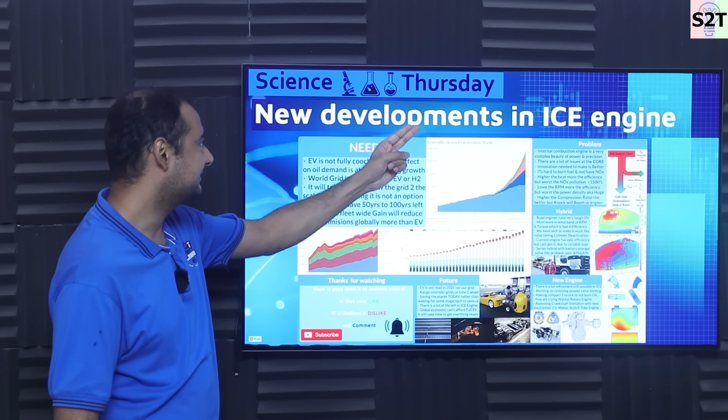In today's show, Science Thursday, we're going to talk about new developments in ICE engine, which seems odd in 2025, but let's dive deep into it.

So why do we need development in internal combustion engine? Well, reality is EV is not fully cooked, meaning that technology was rushed into the market because of Elon Musk, and practically speaking, that puppy is 3 months old rather than 9 months old. So it's not there. And here's the deal.

You can see it in oil charts, as in global oil consumption by any major nation. Outcome is zero, as in it has zero impact. The biggest impact we had in oil consumption was the pandemic. The pandemic actually dipped it. Nothing else did.

And again, you might look, okay, it's not old enough. No, it is old, as old as the iPhone. That's the same time EV happened. And be mindful, there were other companies doing EV before Tesla made it popular for some reason. But people were working on it.

So reality is, as of now, best analytical data, like actual real world data, suggests that the best you are getting out of EV is this line. Instead of going up, it is going like this, and which again I find rather useless, simply because world's population is not expanding, and more countries are going into recession rather than swimming in money. So it's like people's living standard is going up? Like, genuinely, I'm curious, which country?

So from 2010 to 2025, things are not looking up. Population is declining. People's living standard, inflation are running away. So who the heck is drinking all the oil? Reality is EV is not real. It's almost like you released a vaccine for a pandemic and the pandemic is still going on. So fundamentally, it's not real.

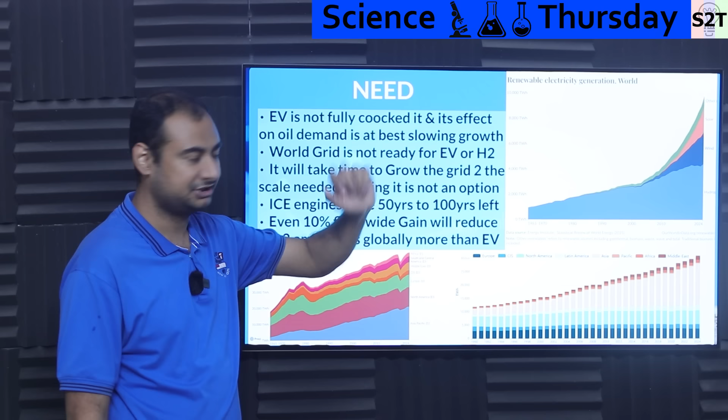Now, here's the deal. Let's just assume you have a magical wand, right? You are some politician who smokes weed, and you're like, okay, what if I just forced everybody to do EV, like how the European Union is thinking, like we're gonna ban combustion engines because let's F the public. Or what if you really do not study mathematics or chemistry or any sort of round trip efficiency or thermodynamic conversion efficiency, or how 8 megajoule is less than 32 megajoule, hydrogen.

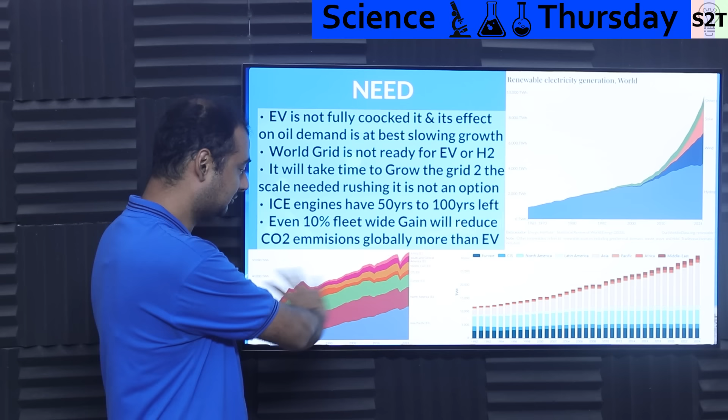Here's the thing: our grid worldwide cannot do that. For example, take all the oil consumption, take the lightest fuel, let's say petrol, how much petrol we are burning, convert that into kilowatt hours, divide that by like 30% or 25% conversion efficiency. That number is so huge that our global electrical grid will collapse the moment you put that much load. Kaput, instantaneously. It does not matter one place or another, all of them.

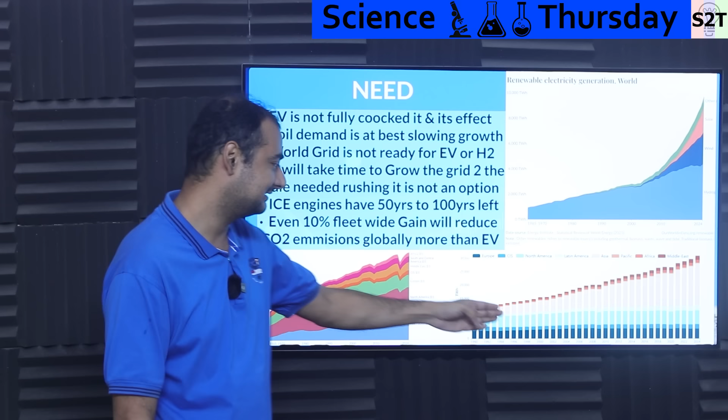This is the world energy grid growing from 1990 to 2024. It has gone from 10,000 terawatt hours to slowly reaching 30,000 terawatt hours. That's nothing. Oil is like, bruh, that's nothing. So flat out right now, you cannot do EV conversion.

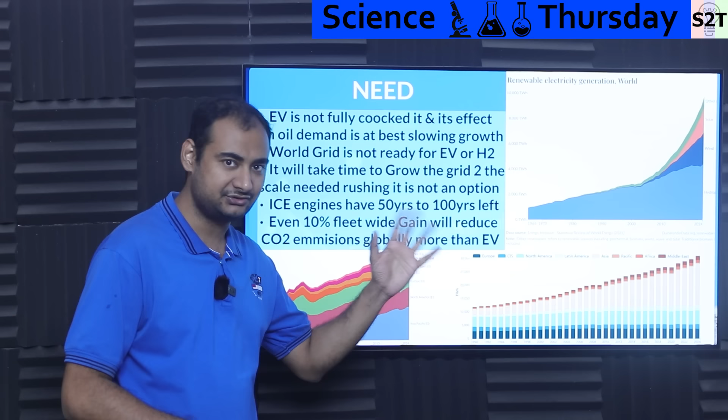And if you cannot do EV conversion, you cannot do hydrogen conversion, because hydrogen has poor round trip efficiency. EV can give you, give or take, let's say 90% easy, like a good built system, 90%, as in 100 units you took, 90 units will go into your electric motor. Hydrogen, you took 100, at best, being optimistic AF, 40 will go to your wheels, meaning twice the price, meaning you will burn your country.

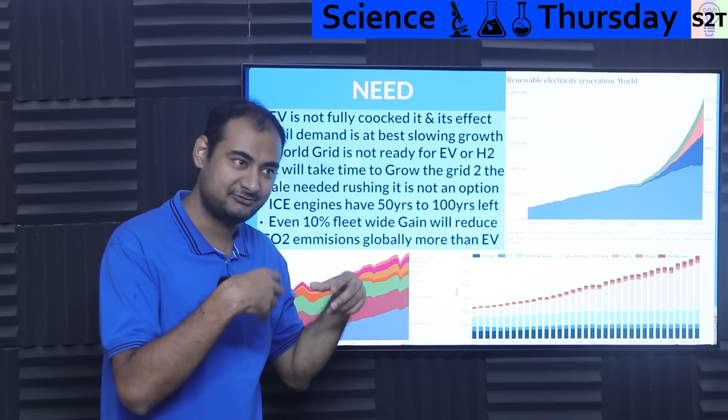And what about the energy grid transition? It's going good, but again, you will find something weird. People talk about solar, like going solar YOLO on it, but why the heck is wind share so huge? Compare this from 1965 to now. It's like, why is that? Well, wind energy has this unique advantage that whenever a single plant is built, it's huge, like they started talking 2 gigawatt, 22 gigawatt.

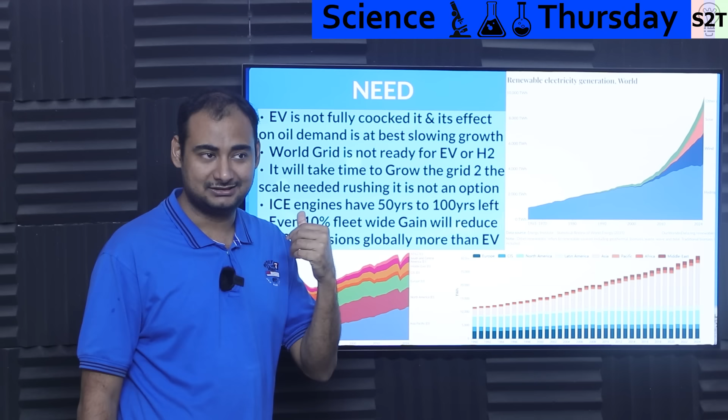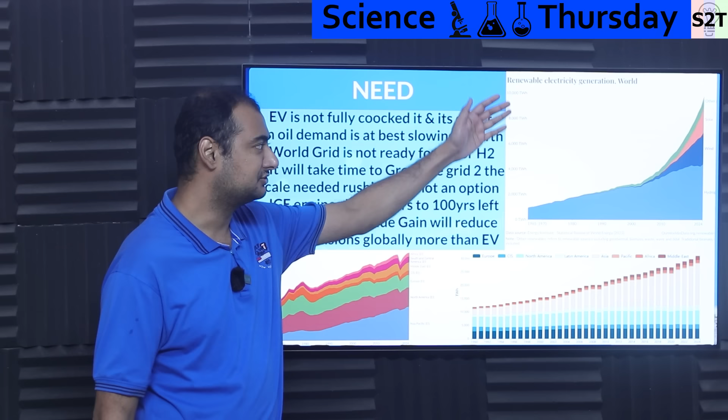Wind turbines are now reaching above 10 megawatts. Most new wind farms being built are above 10 megawatts right now. You can easily find Haliade-X or something like that from General Electric. Those are 16 megawatts. That is damn high, and you put them offshore where yield time is very high, so the amount of energy being created by wind is huge. Solar is also going huge. And then we have some minor things here and there.

Realistically, at this point in time, our grid needs time to grow for managing EV. It's not ready yet, let that be very clear. Going into full EV will shift-delete your country, flat out. Do not give me comparison to some teeny tiny whiny nation, give me comparison in top 10 population countries. All of them will have the same outcome: if you do that much EV conversion instantaneously, the electrical grid will go kaput.

So what does this mean? Grid needs time to grow. Will the grid grow? Of course it will grow. You can see it's been growing slowly, but it is growing. So it will grow, that's a sorted problem. You do not have to worry about it, but you cannot rush it.

Where will you get the money to force people to jump into EV, and then at least 5-10x the money to create the grid infrastructure to handle it, and then 20 to 40x the amount of energy production to handle it? It's not happening anytime soon. It has to be done slowly, it has to be grown like how you grow a tree. It cannot be rushed, that's not an option.

So what does this mean for you and I? Simply means the ICE engine, bare minimum, has 50 years and easily 100 years left. If I'm being idiotically optimistic, let's say somebody invents something super magical, or heck, we crack fusion energy, only then can I see it happening in 50 years, but the likelihood is almost zero. I'm too old for fusion now. But 100 years, easy, you do not have to worry about it.

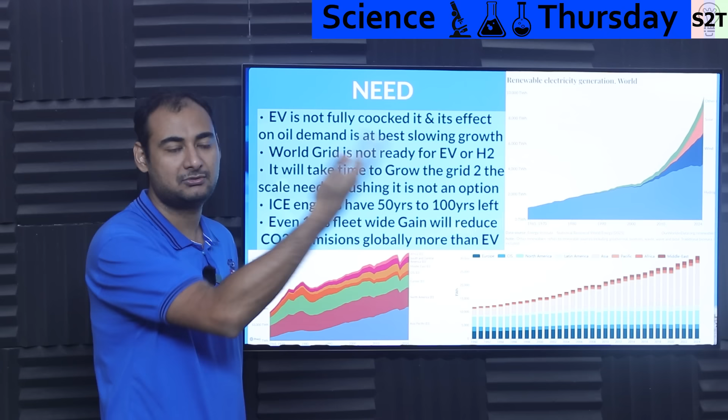What about the future? The only viable solution we have, which has the least consequences and the most viability, is seaweed biofuel. Nothing else has the probability of working. You cannot grow it on land, you cannot grow ethanol or anything on land simply because you will shift-delete food crops, and the penalty of that would be stupendously high food prices. Indians are slowly starting to realize that, because our politicians pushed ethanol. So that's the reality of it. You can only grow it in the sea.

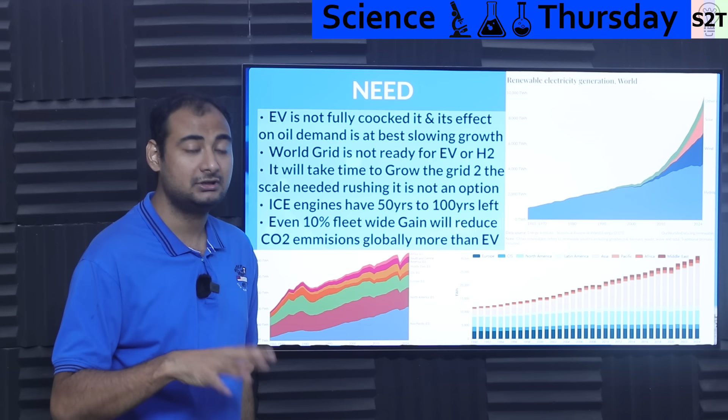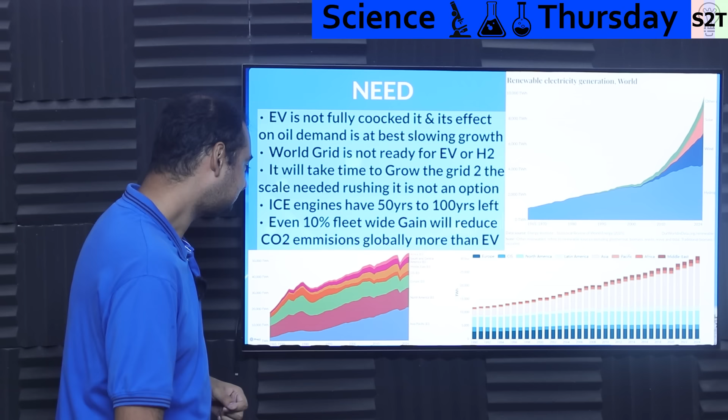What about the bio-environment? Here's the deal: you do nothing, the whole planet dies. You shift-delete a small area in the sea, and given the surface area requirement, it's super easy to do. From India's point of view - I'm not talking about Afghanistan, I'm talking about India - we will not even touch international water, we can literally take care of it in our own economic zone. We do not have to go to China or other places, within that alone we can easily take care of it.

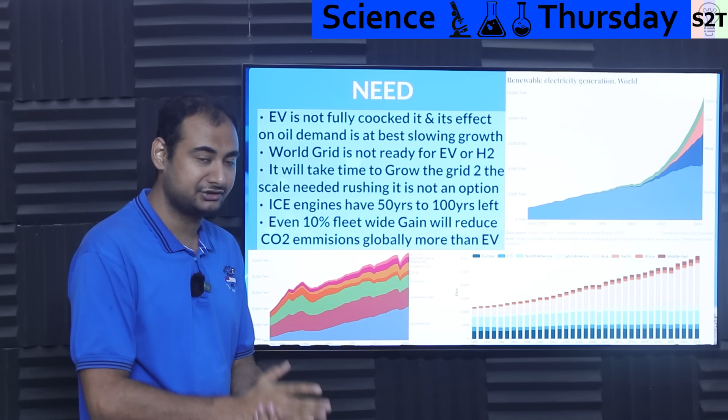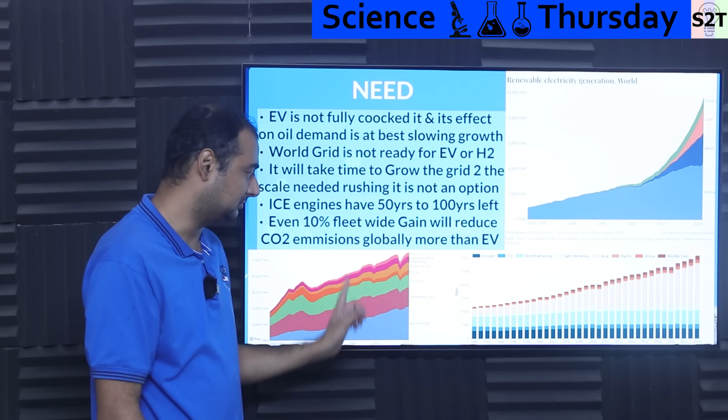So saving the planet takes priority, and then you have to make sure the combustion engine is better. Right now, talking 2025 fundamentally, you can negate all the CO2 talk around EVs simply by improving combustion engines by 10%. That's the reality. Check all the data, all your sources, go YOLO, especially on crude oil - there are 10,000 data sources on that, go YOLO. So what exactly is the problem?

Well, the problem is the internal combustion engine is very complex, a beauty. It is brutal in terms of power and precision. And because I'm working on making one of them, I'm realizing it is brutal. You will think, oh, I have the CNC machine, I'm going to put this and come out, but the part does not work. It does not match the tolerance requirement. Because we have mass produced it and fine-tuned the whole design, it feels like it's an engine block. No, it's black magic.

Fundamentally, it is complex AF. And power and precision, think about this: we are talking about something that handles a boom event 6,000 times a minute. It's like boom, a boom, a boom, and you can have 12 or 16 of them in a car. It's like, what?

So fundamentally, there is a lot of complexity, and the penalty of that is there is a lot of issue at the core level. Basically, the core things we use in an engine have some problems, and then there are certain physics-level things that make things complicated.

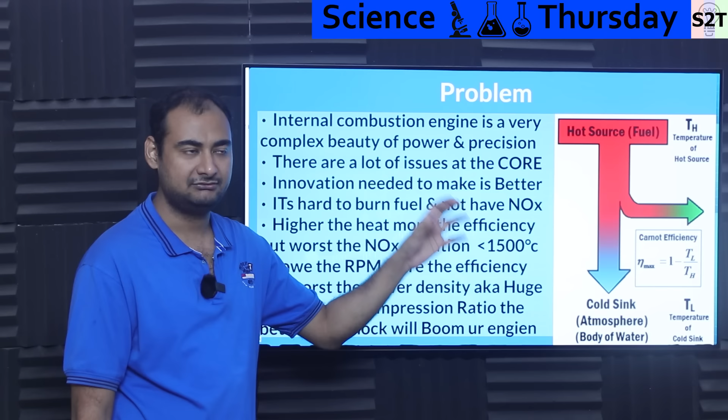So can we change it? Can we solve it? Of course. Exactly how we have improved from what basically Henry Ford had. If you take my cheap car engine, like a Maruti S-Presso K10 engine, and gave that to Henry Ford, he will have a stroke. It's like, what black magic is this? And that is the cheapest engine you can get. So fundamentally, innovation will allow you to make it even better.

Now, why are people innovating now, not 70 years ago? Petrol was cheap, nobody was caring. I know the fuel prices when I was in school, and I'm only 32 or 33 years old. That time fuel price was 40 rupees per liter. Now it's 100. So the price has almost more than doubled in less than 20 years.

So as fuel becomes more expensive, you start to notice, oh, my pocket is starting to hurt. Rich people do not worry about mileage. That's why you do not see what is the mileage of a Bugatti Veyron or a Ferrari. That does not make sense. If you're driving a Ferrari, you are not poor enough to worry about those things. You are rich enough where it's just go to the pump, fill it, go home. I ain't got time to count. So that is there — innovation can make things a lot much better.

Now, why do we have such a cumbersome rule with combustion engines? Well, simply because it's hard to burn fuel and not have NOx emissions. This law of physics says the hotter your boom event, the more useful energy you can get out of it, like Carnot efficiency.

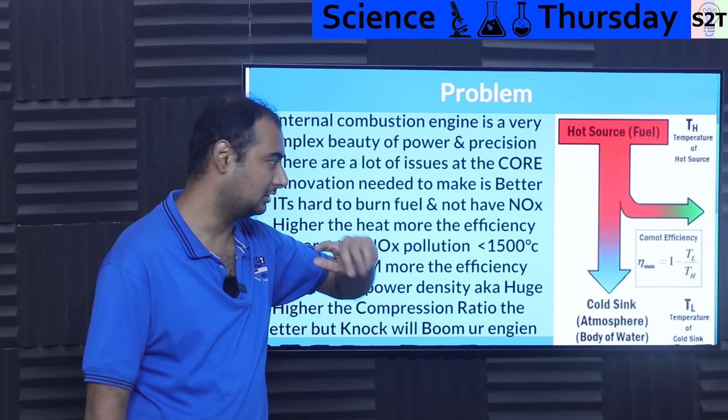But here's the deal: when you are flowing air into the engine, it's not oxygen only, you have a lot of other stuff. The biggest other stuff is nitrogen. And if you have that much nitrogen going in there and the temperature is brutally high, along with some oxygen, it will create NOx. So basically, the moment you start to reach 1500 degrees Celsius, NOx emissions start to go up.

But again, physics wants you to be at higher temperature. Physics is like, bro, you want efficiency, you have to have higher temperature. But if you have higher temperature, like diesel engines, you get higher NOx pollution. That's why people hate diesel. It's like diesel loves compression ratio. People started to make high compression, and it became thermodynamically more efficient. So people loved it, they used it more because it was actually consuming less fuel.

But while the CO2 output went down, the NOx output went YOLO. Right now it is so bad that we have to use ammonia in exhaust gas treatment to make sure it does not pollute the whole environment. Because again, physics is like, bro, heat it up.

And NOx is like, easy, bro, easy. Same applies with jet engines also. They're like, we want fire. And NOx is like, are you sure about that? So you can see how we have two things that are firing missiles at each other. It is hard to manage.

And RPM, that's another vector you are familiar with. RPM is so weird, as in the lower you make it, the more efficient it becomes. Right now, the most thermodynamically efficient engine is basically marine engines used to propel ships. Those can touch BSFC value as low as 150 to 160.

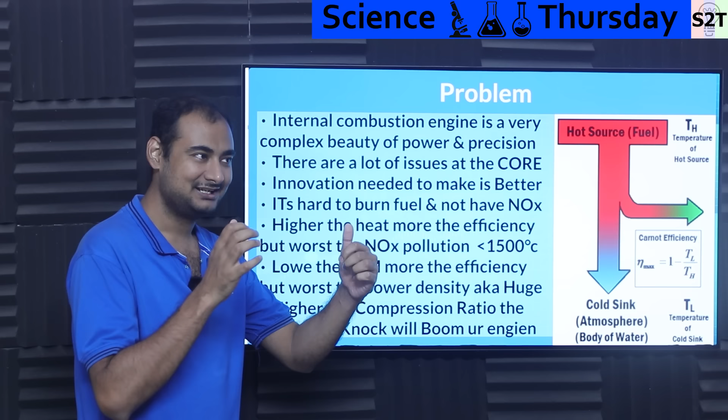The higher the RPM, the higher the density. Cool, awesome, GG. But poor the mileage, so to say. So if you're like, okay, why not just make big engines, like let's say a locomotive. If you make a locomotive engine as huge or as low RPM as what is used in ships...

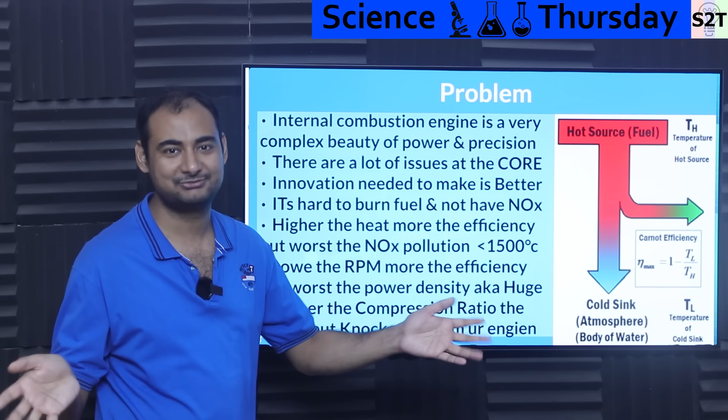It will not fit in a train. The whole train will not be able to fit it, it will be so big. So that's the fundamental issue. That's why they only work in a container ship. That area has the space and weight constraint loose enough where they can actually do that. So you see, there is a paradox. You're like, okay, what if I want more efficiency because petrol is expensive? Cool, awesome, reduce the RPM, but your engine size grows. You see the paradox? So this is the issue.

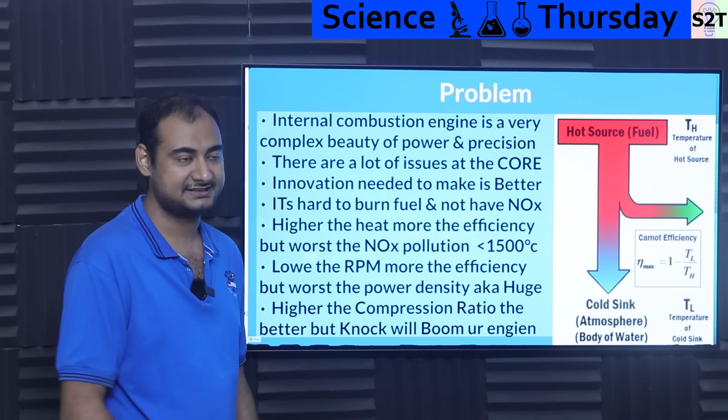Another aspect is, what about compression? What if you go higher? If we started with very low, like 4:1, 8:1, now you're at 14:1. But you can't really go that high unless you have something like octane or ethanol blended into your fuel, because again, knock will happen. As in, before you reach your top dead center, your fuel and air mixture will auto-detonate. It will kaput your engine, flat out kaput your engine. So even though physics says higher the compression, higher the temperature, higher the efficiency, knock says, are you sure about that?

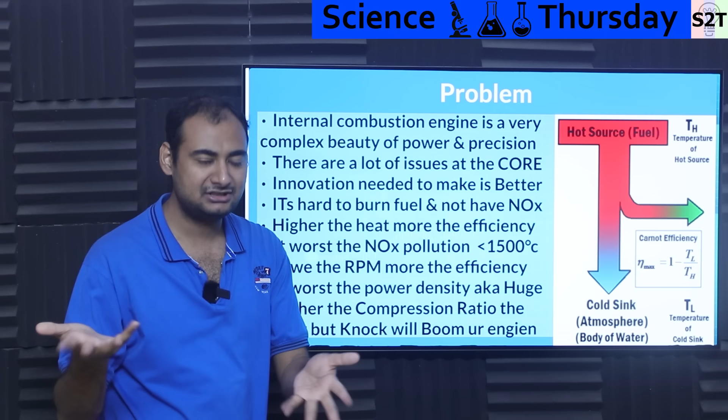So there is some genuine problem. It is not easy to design an engine that is super efficient and not polluting, super efficient and small. So you can see it's very brutal, and very not black and white, because you're like, okay, what if the engine is bigger? Yeah, the engine will weigh so much that your per kilometer mileage goes down. So fundamentally, it's a messy problem to solve.

So what can we do? Well, there are a lot of options. Option number one is hybrid, because right now road engines have a very tough life, meaning you can easily find road engines that have this sort of stupid curve, as in they're supposed to work as low as 500 RPM and as high as 6500 RPM.

That is huge. To give you context, your power plant generator rotates at 1 RPM, the end. It starts, it rotates, the end. There is nothing more than that, and it runs your whole civilization. If it's a 50 hertz system, 1500 RPM, it's a 4-pole generator, or it could be 2 poles, so it's like 3000 RPM, done, go home. It stays there, it's 3000, the end. There is nothing after that.

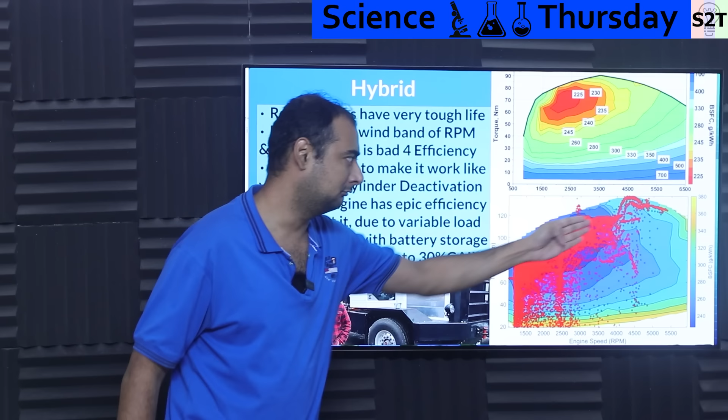It's brutal. Your engine does not like this, and you can see that in the BSFC chart. Let that be very clear - every engine is measured by that. You can measure a vehicle's mileage as kilometers per liter or miles per gallon, but engine cannot be measured that way.

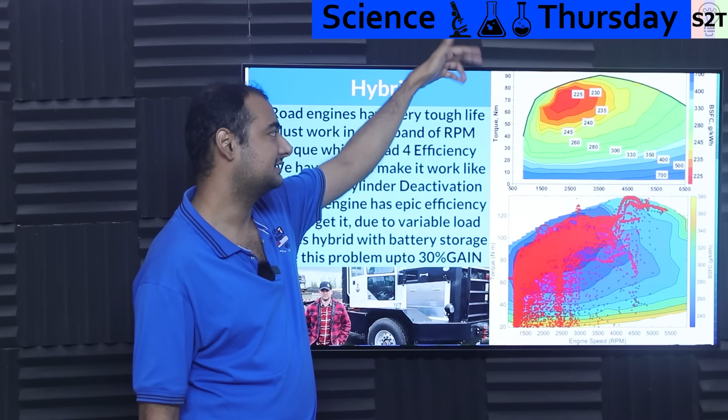So we invented BSFC. Now BSFC is calculated by setting the engine to a fixed RPM, then you put variable load on it - 10 Newton meter, 20, 30, 40, 50, 60, 70, 80, 90 - and you do this throughout the RPM range. That's how you get the BSFC curve.

Now this tells you where the sweet spot is. Because combustion engine is so complex and weird, it has this tendency - if you idle it, you will burn more fuel. It is better for you to shut off your engine than to idle it.

For example, let's say you're at 2500 RPM, cool, normal city traffic, and you're just idling your engine - your torque load goes down. Here's the deal: you will burn as high as 500 grams per unit of energy. Only 1 unit of electrical, and you have enough parasitics that you do need load on it. So 500 grams will be burnt just to make 1 unit of electricity.

But what if you put load - what if you put 70 Newton meter? You're at the sweet spot, loading that puppy. Now you only need 225 grams of fuel to make 1 unit of electricity. That's the key point. So right now, because we want engines to work in such a vast range, we cannot utilize this sweet spot. We want our engine to stay here.

The end - why? Petrol is expensive. The end, do not talk about anything else. We want power? No, you want mileage. You can't afford power, otherwise you will buy a Bugatti Veyron. So flat out, we want to stay there, and we cannot afford to. Environment cannot afford to. Our pockets cannot afford to.

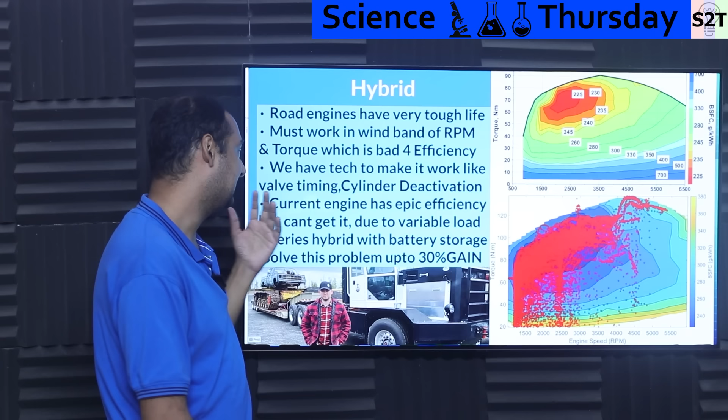So we have created a lot of technology to extend that band, so to say. We have variable valve timing - almost all engines have variable valve timing. Some supercars started to introduce cylinder deactivation, which is slowly trickling down. What if you have a 6-cylinder engine, you turn off 2 of them when idling, because you do want some load. It's better to have dead cylinders rather than all cylinders working at partial load.

So we do everything, but here's the deal - current engines available in the market, in your car, are very efficient, like bonkersly efficient. If you have a real-time mileage counter in your car, you'll notice that sometimes the numbers are too good. It's not too good - it's when it stays here.

But because of variable load, your engine never stays at the sweet spot - it goes like this. That's what happens to your engine, that's why it's not shining. Because when you give accelerator, your engine computer is like, okay, how much load do I have, how much torque is that, feedback happening from the transmission. And even if you are perfectly well here, then the wind starts to flow, your Newton meter will go up, your efficiency will drop. So fundamentally, this is the outcome.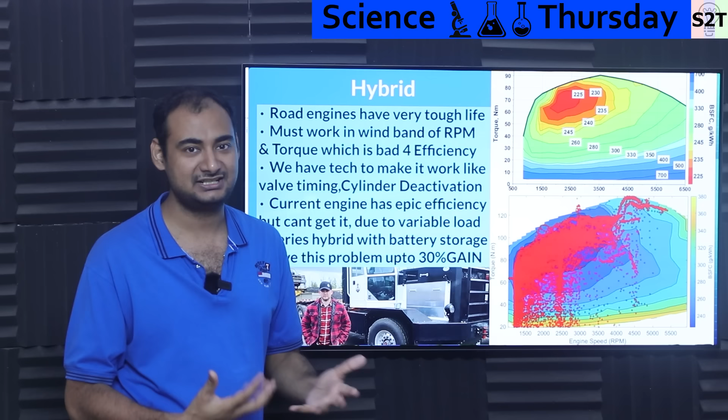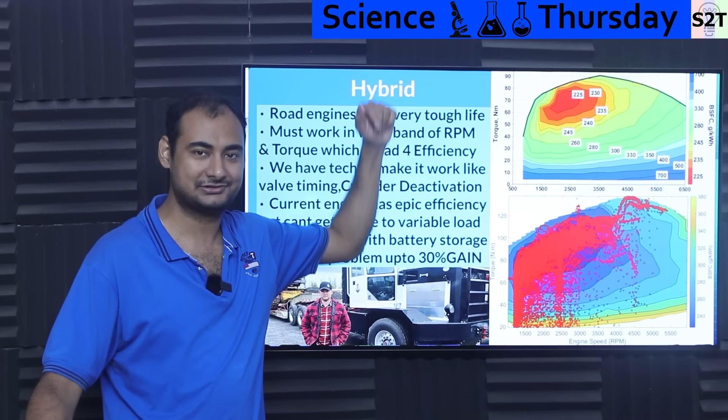It has variable load. So series hybrid solves this problem specifically with battery storage, because companies figured out that at least half of the problem can be solved - you can lock the RPM if it's a series hybrid. That's how diesel locomotives have worked for a century, and diesel submarines are even better because they lock the torque also, so they get the best mileage conversion. So why don't we do this with cars? Again, petrol was not expensive enough.

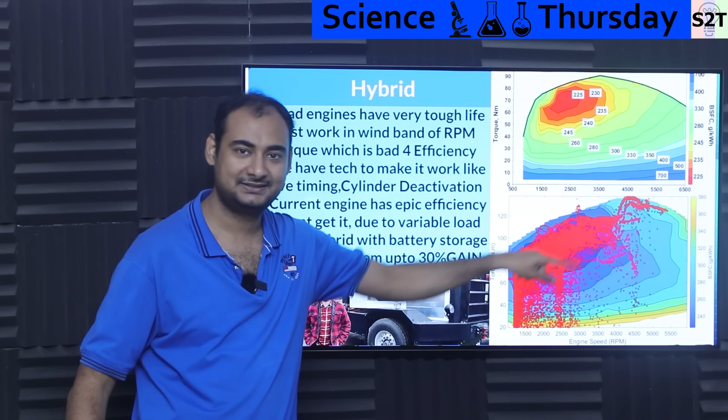Now, the development of EVs did allow this technology to be viable. Meaning right now you can have a series hybrid, where you have a combustion engine driving a generator powering a battery powering the motors, because motors can handle random efficiency, and motor efficiency does not change that much unless RPM goes way too low or way too high. It's good.

It has a much wider efficiency curve, and if you have good enough motor driver electronics, it's negligible. You do not have to worry. It will be like, okay, I'm going to consume this much unit of energy to run 15 minutes. It will take that much.

And again, battery allows you to have a reserve. Basically, this puppy stays there, gives a pipe. That pipe would be, let's say, 100 kilowatt. Your buffer handles it. Buffer slowly fills up, slowly drains, fills and drains. When you need to take over, the buffer drains, not the engine. Engine does not change the loading. Engine stays at the sweet spot.

The battery goes down, then you do regen. Battery absorbs the energy. Generator does not shut off. So it turns on, stays on, charges the battery, turns off, the end.

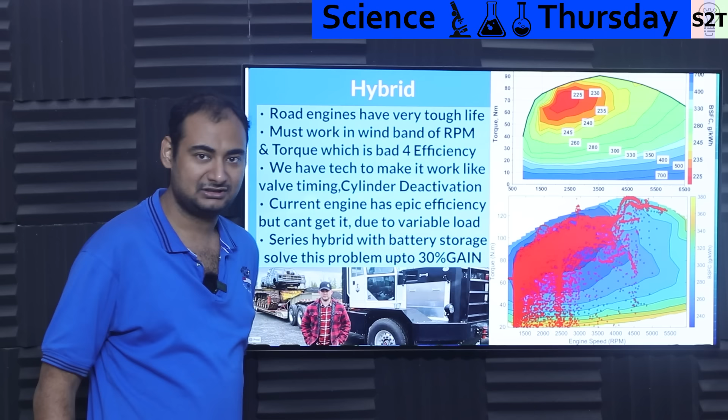So how much of an impact will this have? Well, if you start to do this on a large vehicle, a 30% gain is viable. Especially if both the RPM and torque loading has to be locked. And 30% on a big vehicle is like you are yeeting one car out of the road. That's how magnificent the impact would be.

And no new technology is required. Everything needed for this is right now in the market in 2025. And Toyota had this in 1993, I think. That was the first time they started. They had this technology with nickel hydride battery, but people smoked too much Elon Musk. They're like, no, we want 100% EV.

It's like, bro, the grid is not ready. If you had given this, everybody would have EV by now. Everybody would claim like, oh, I want 1,000 kilometer range. No, you don't. You say that, but most of the time you can't drive that much. Just have a small range, charge your battery, and if you forget to charge it, your combustion engine takes care of you.

And again, Toyota was halfway there. They almost reached it, but they were like, what if we had series-parallel hybrid? It's like, no. But to be fair, at that time I think AC compressors were not electrified yet. Right now we have AC compressors that are electrified, so that problem is solvable, and you can take care of big loads today.

And if you have electrical infrastructure growing, like let's say a lot of trucks are going, then people can say, hey, I can put a high power charging station because I have demand. Then they're going to put it there and charge the battery directly, plug-in hybrid.

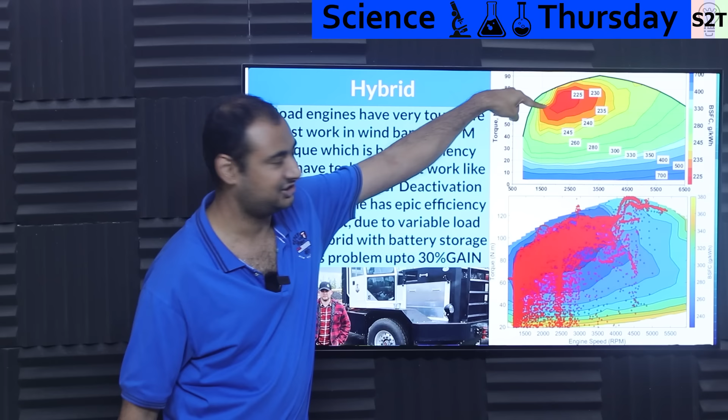So hybrid will give you direct pollution reduction right now. If you go full EV, all you are doing is pushing the pollution somewhere else. But hybrid will actually reduce pollution now. And if you did this for almost every combustion car, 80% of people would have EV, 80%, and 20% of the time they're like, oh, I'm actually driving long distance, so I'm using combustion. And again, even then, the combustion will be far more efficient. Sweet spot. But no, everybody wants full EV.

Now, okay, that solves how can you get the most out of the engine you have. But what if your engine became better? Well, there are a lot of refinements possible in ICE, let that be very clear. Even though it looks like a 150-year-old technology, it is 150 years old. There's a lot of things that can be done.

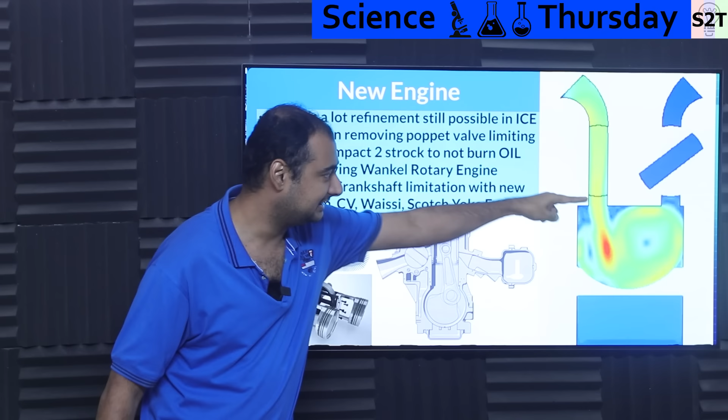For example, there are a lot of people working on removing the poppet valve. The valve that goes in and out, physics does not like it. The valve is like this, air has to come like this, go around it, come here. Physics is like, nah. So some people are like, what if you have a rotary valve?

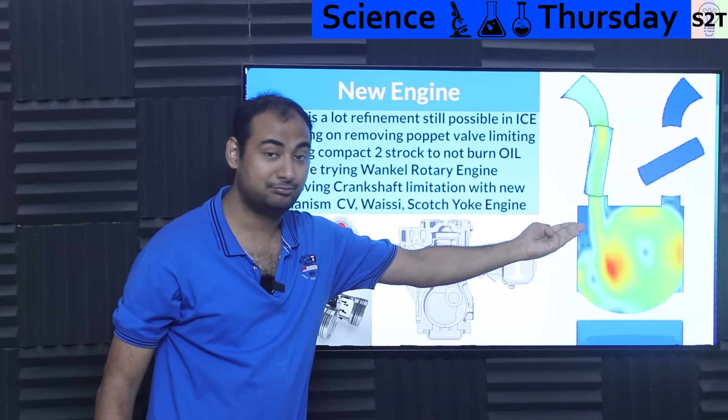Now, does it work? Yes. Then why don't we use it? Well, it has a problem with sealing. Basically, when we go ba-boom, the seal does not hold up that well. Poppet valve is GG when it comes to seal, it's like you can go kaput in there.

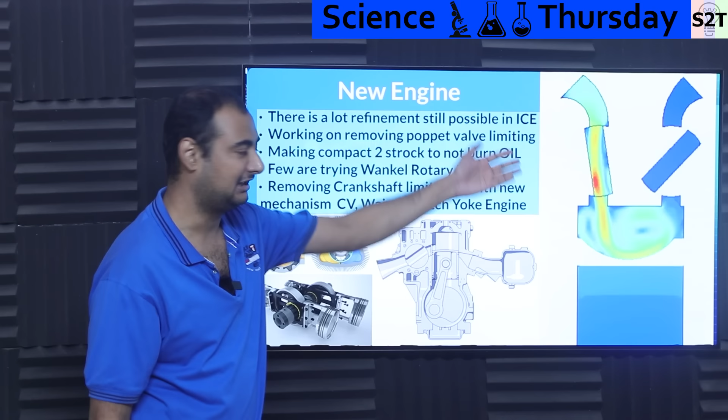And it's like, I got this, not a single atom of gas will leak. It's that good. When the valve is rotary, it leaks too much. So people are trying to make that work, and let them figure it out since patents expire in 20 years. So if you see somebody else has already patented it, you can still make it, especially after 20 years.

So, as in from patent date, some people are trying to bring the two-stroke engine back. Why? Two-stroke has one advantage: it solves the energy density issue, meaning your engine becomes compact, has less mass, so it becomes more efficient and more logical for a range extender.

So these people are making this engine, I have linked the video down below, and it's really smart. It's basically what container ships are doing right now. It does come with one penalty though, that they have to use a supercharger.

Supercharger directly runs on the crank, so it has a higher phantom drain compared to turbo. Turbo works on exhaust gases, so turbo does not have that load. That's why we are switching to turbo, not supercharger.

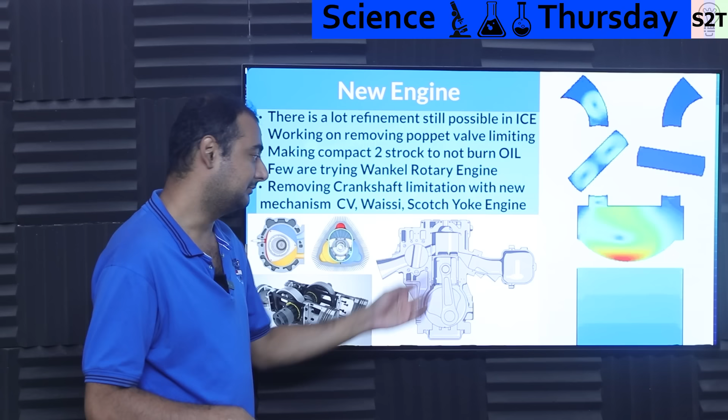But again, then why do they have a supercharger? Because this engine cannot breathe on its own, it doesn't have the ability to breathe, so you have to force air into it. But it does work.

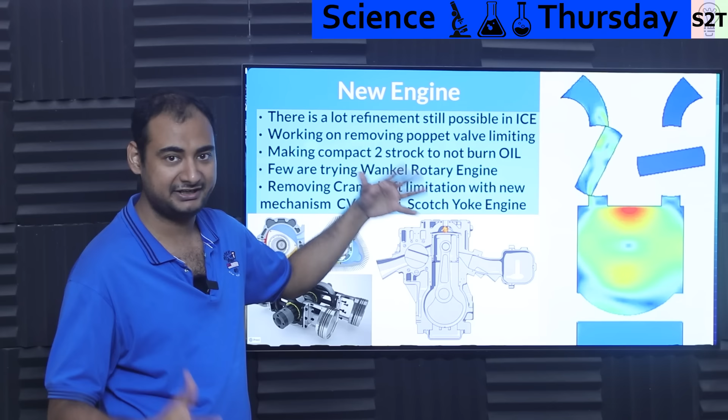And again, they solved the rotary valve problem by making sure the boom event happens in an enclosed environment. You get the full oomph, and by the time you have to exhaust it, even if it leaks a bit, that's fine since you're supposed to let those gases go anyway. And again, it does not use the second part of the chamber to suck air in, which is the biggest issue of the two-stroke engine.

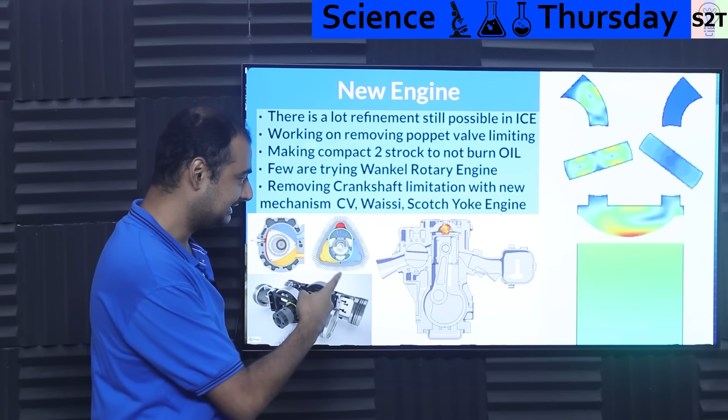Thankfully, I can do the same thing with a CV engine. I'm asking Ron to design it because again, we have linear travel, we can have the backside of the piston acting as a compressor, so we can breathe without a supercharger or turbocharger.

And I think, if I had a direct talk with them, I'd say yeet the supercharger, put a turbocharger there instead, basically the same turbocharger utilized in F1, with a thermal energy recovery system. Why? At the starting motor, when this has to breathe, you start it and the electric motor spins the turbo, so it can actually start. Once it starts, exhaust gas will keep it running.

And then you can extract that energy also, because turbos are what we call a positive feedback loop, meaning you keep it running without any retardation. It will go YOLO and boom your system, so you put load on it. That's how F1 can achieve 51% thermodynamic efficiency.

And large container ship engines, again, they have turbos and they can extract upwards of 500 kilowatts of electrical energy, so much that they can shut off the auxiliary generator. The propulsion engine and aux generator are off, it's like, bro, we do not have to burn it. Turbo has that much power.

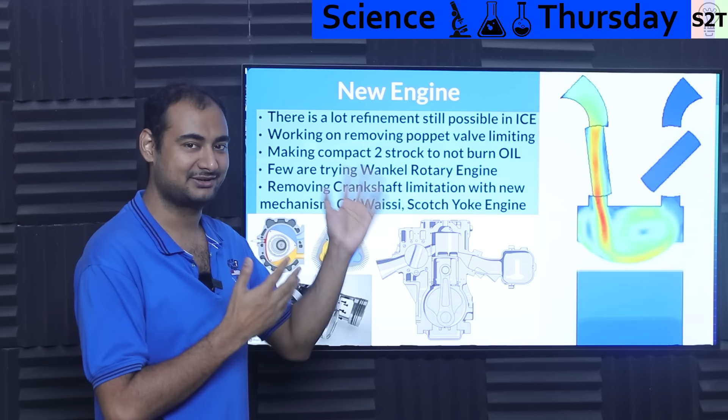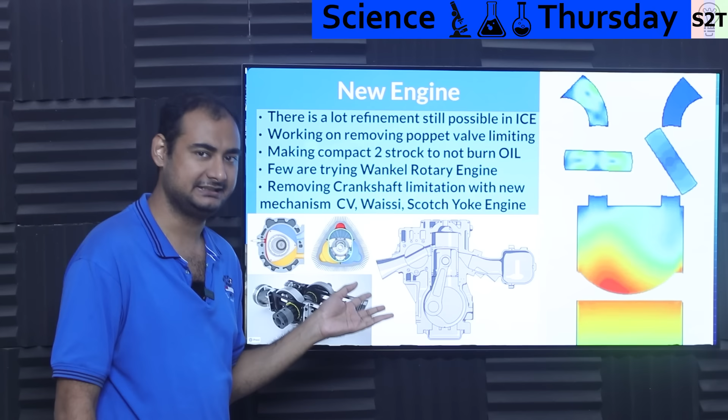So that's how I will improve it, and yeah, it will make it electrically a bit more complex. But again, everybody wants good BSFC. This BSFC is good but not that great, I think they have 230 grams. So not that great, but again, that will solve the problem. They can easily make it even better.

So a lot of people are working on how to make a two-stroke that does not burn oil, on a small scale. Ships already do that on a large scale. And then a few are making Wankel rotary engines, this sort of engine.

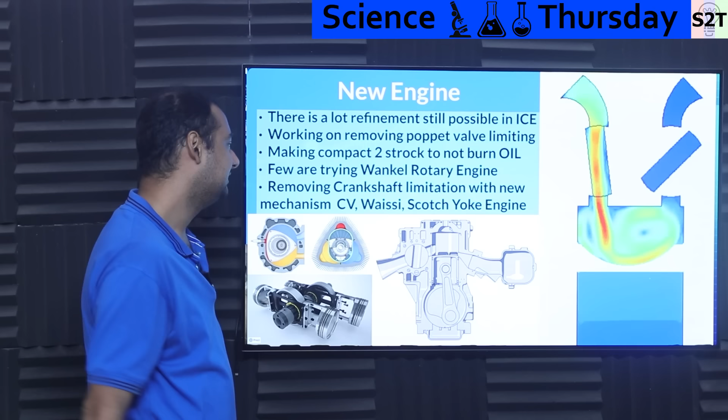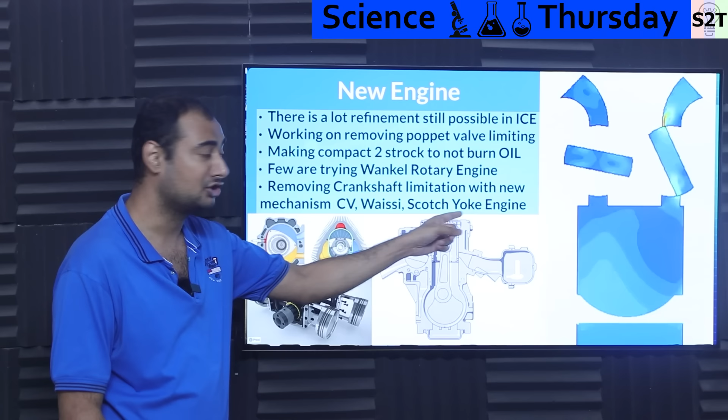And a lot of people are working on removing the crankshaft, like the CV engine, my design — well, not my design, Ron built it, my company. Then you have a Waissi engine that has a spinning disc. Then you have a Scotch yoke engine using the Scotch yoke design. Lots of people, because the crankshaft is the biggest physical limitation.

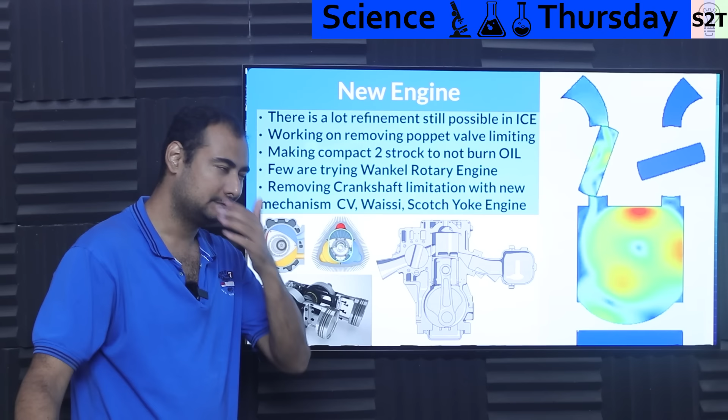It's like this motion going bam, bam, bam, burns a lot of energy away. If you can convert that into rotation, linear to rotation, without wasting energy, you should have bonkers high BSFC, like with free piston engines — in principle, if they really work as good as people claim, it should touch almost 130 grams. Be mindful, right now the world record is 150.

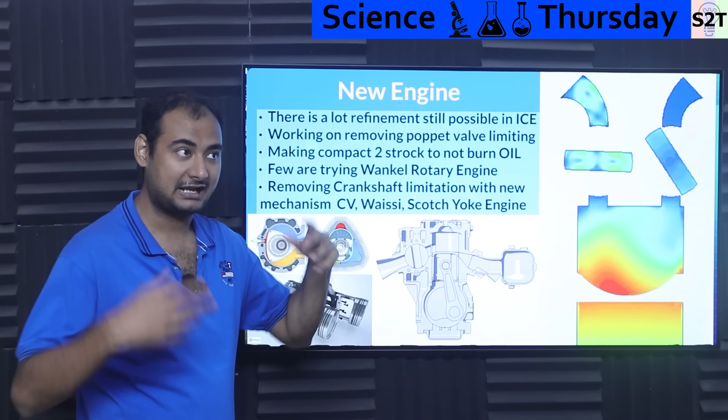So a lot of people are working on changing engines, and again, this engine is really good. And with my CV engine's linear design, we can literally remove the turbocharger, or have a turbo for extra oomph, so that is doable. And again, if you're like, okay, what are the three differences in this?

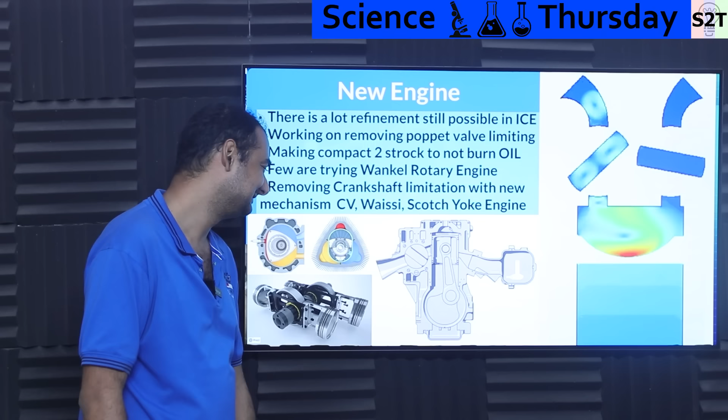CV engine has all rolling elements, the Waissi engine has sliding elements, and the Scotch yoke has sliding elements. That's the core difference. So a lot of new engines are being worked on right now, including that one weird one-stroke engine, which again is actually a two-stroke engine. It's a marketing term, one-stroke, but it's two-stroke. A lot of people are working on it right now.

So what can we expect in the future? Well, the reality is EV is not ready. Let that be very clear. You have to actually accept the factual reality. EV is not ready, and our grid is definitely not ready. It's like, bro, not even there.

So fundamentally, people are doing that, and it's like, hey, it saves fuel. You would say it has so much conversion loss. No, it saves fuel. Why? It's the sweet spot. So we can save the planet today.